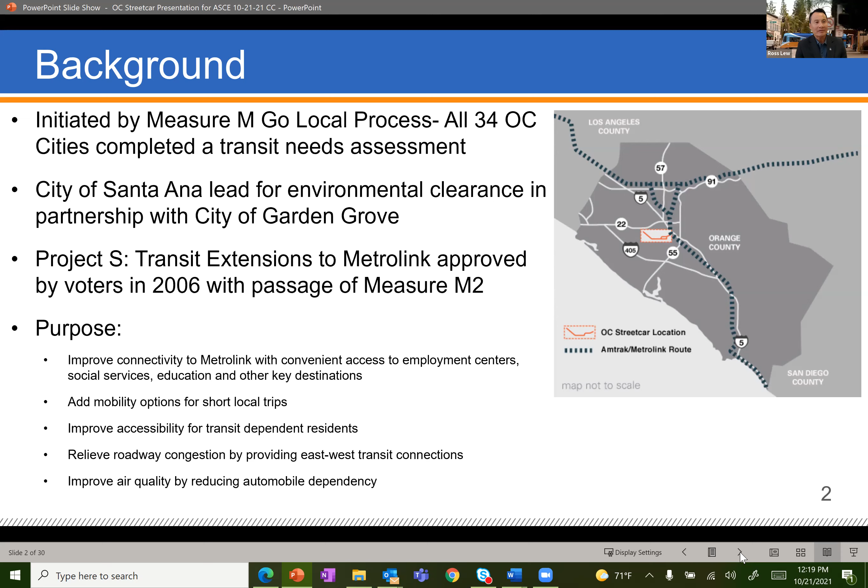As Kelly mentioned, the project is primarily in the city of Santa Ana, which has been very supportive of OCTA and this project. And there's a vast community within Santa Ana, and I'm going to have Teresa share with you the outlay of those communities.

Oh, I see a green block on the screen. I'm not sure where that came from, sorry. No worries, we can somehow turn that off. I'm doing my best. Thanks, Teresa. I'm going to stop sharing and get out. Okay, there we go. Again, I apologize for the technical issue. No worries.

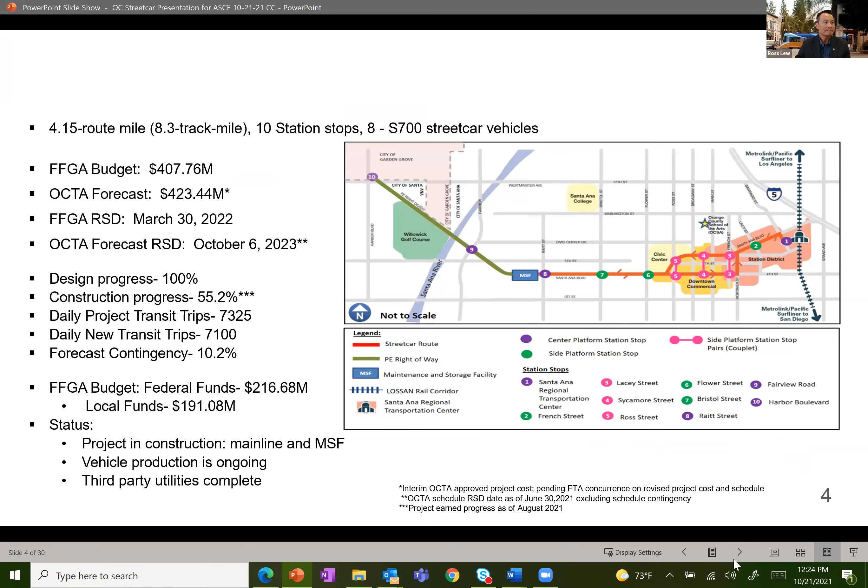And that's why I'm looking so forward to getting back in person, not having to deal with technical difficulties or the mute button. So we can go back to the previous slide, Teresa. Yep, just a second. Sorry, again, not sure. Oh, that's okay. So I think I left off, it's about... oops. Sorry, this is. Okay, how did we somehow get out of order here. Okay, I'm on this, okay, hang on one second.

Okay, thank you. So currently our budget for this project, which includes the design, the planning, environmental, construction, and project management, is $423.44 million. Our current forecast is to have the revenue service date, in which the trains will be running and open to the public, on October 6th of 2023.

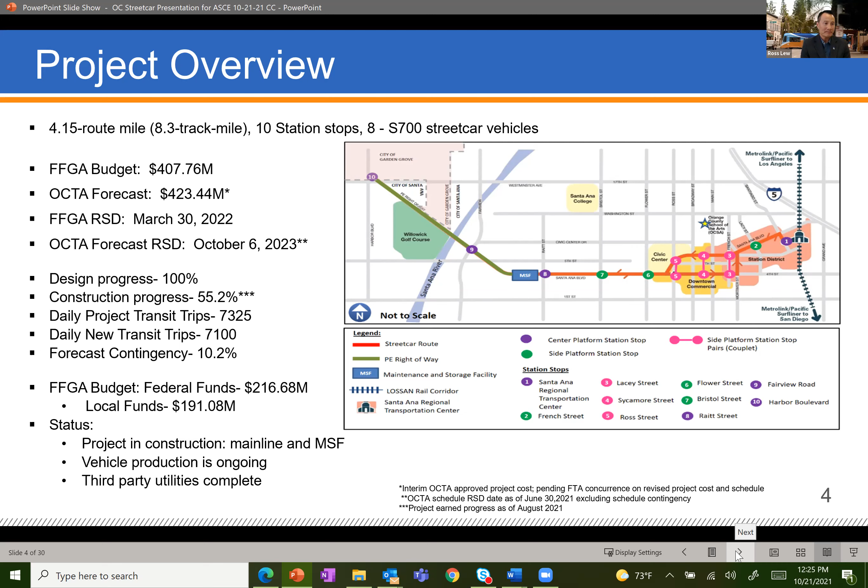Design is done, as you know, it's in construction right now. We're about 55% in terms of construction completion, based on what the contractor has submitted in his pay applications. We'll go into the next slide.

Okay, here's how the project's organized. The image on the left, I'm not going to go into details for every element, but basically just to point out, it is a large team that's needed to manage this project. Some of the key players on this project are highlighted to the right side.

We have HDR as our program manager doing the design and also construction. We have HNTB as the lead designer, along with all the sub-consultants, including DS Yorman, FPL, and others. Walsh is our main contractor; we're a little over 2 years into this construction.

We have PGH Wong as the construction manager, and I want to reiterate HDR, as our program manager, manages the overall construction, coordinating with Walsh and also PGH Wong. An important player on this is Siemens, who is the main vehicle manufacturer, and Cleve will go into a little more detail on that. We also have Herzog, who will be our operation and maintenance contractor once this project is up and running.

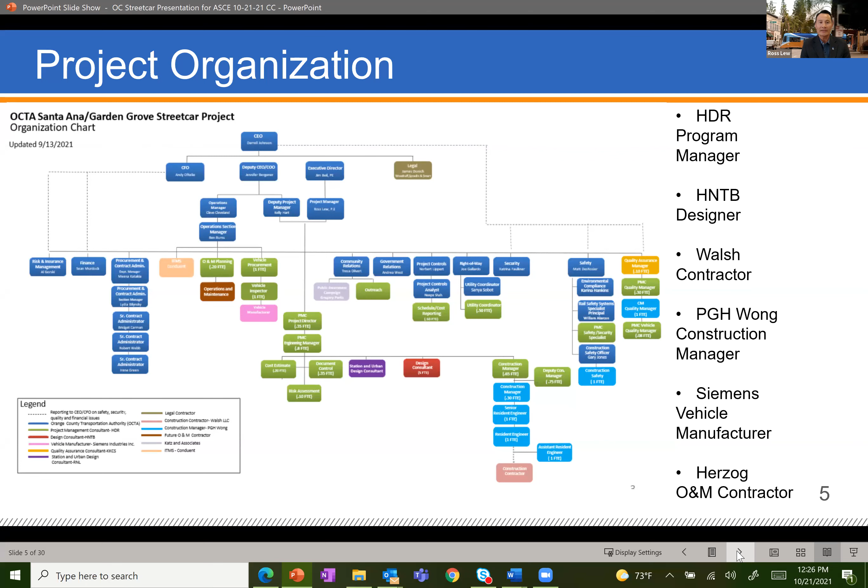As I go into the construction, I want to share the two main features of this project. We'll start with the blue box on the left side, where the alignment goes from Garden Grove at the top left down towards Santa Ana. Within this segment, the streetcar is within the Pacific Electric right-of-way, owned by OCTA. The uniqueness here is that the tracks are on ballast, which is the typical rail track, and when it crosses onto bridges, it's a direct fixation track. There are a couple of key elements associated with that segment, including bridges and at-grade crossings.

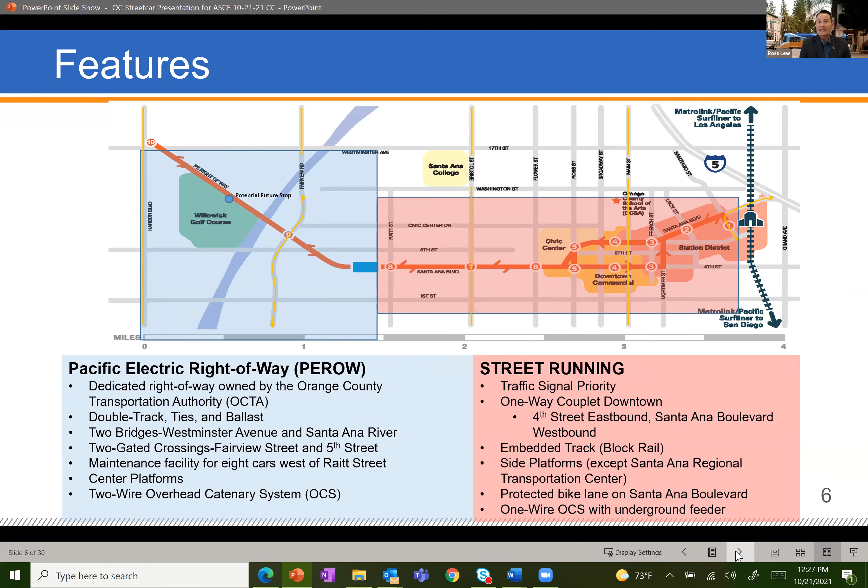On the right side, shown in a salmon color, is where the streetcar transitions from the ballast track onto street running. In other words, the track is embedded within the street and flush, so running alongside the streetcar is a lane that vehicles can also use. Okay, let's go on to the next slide.

We'll start with segment one, which is in the PE right-of-way on the west end. As noted, there are several bridges associated with this segment: the Westminster Bridge that crosses over Westminster, and the Santa Ana River Bridge. We also have the large maintenance and storage facility, two at-grade crossings at Fairview and 5th Street, and several stations along the way. Next slide.

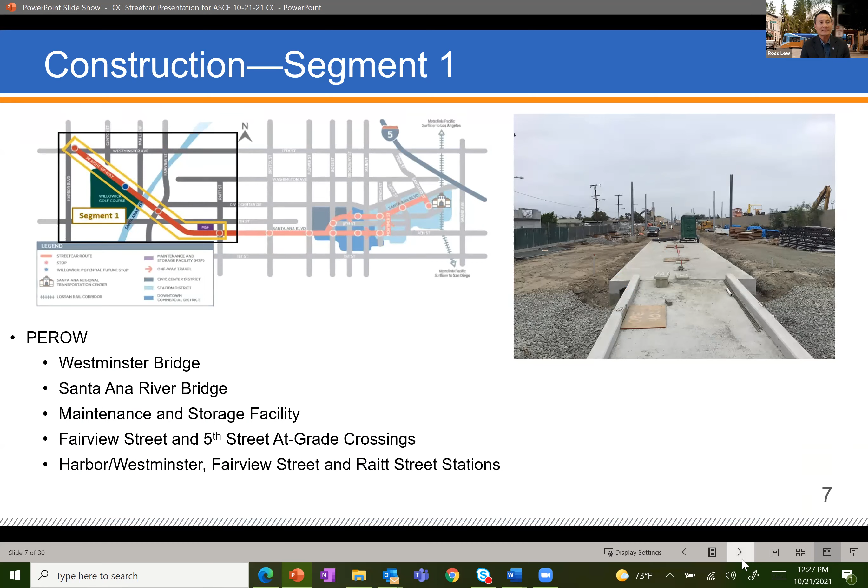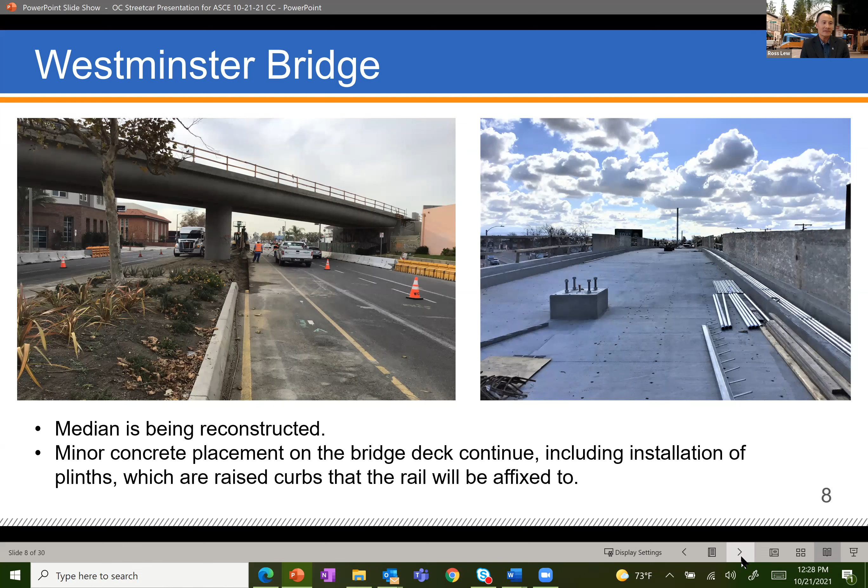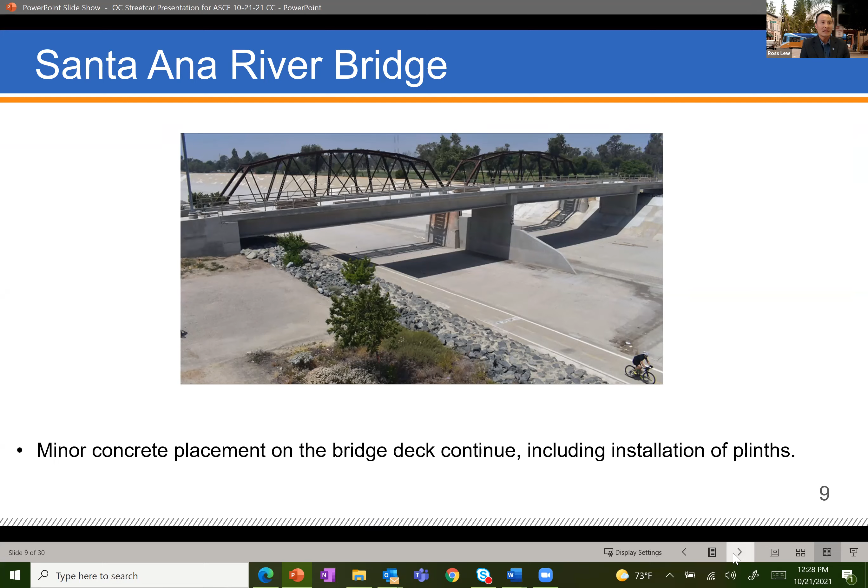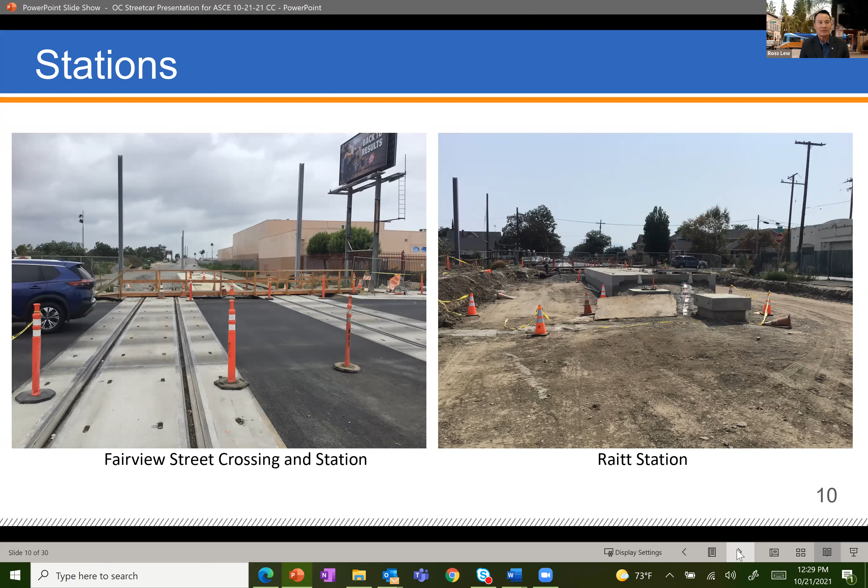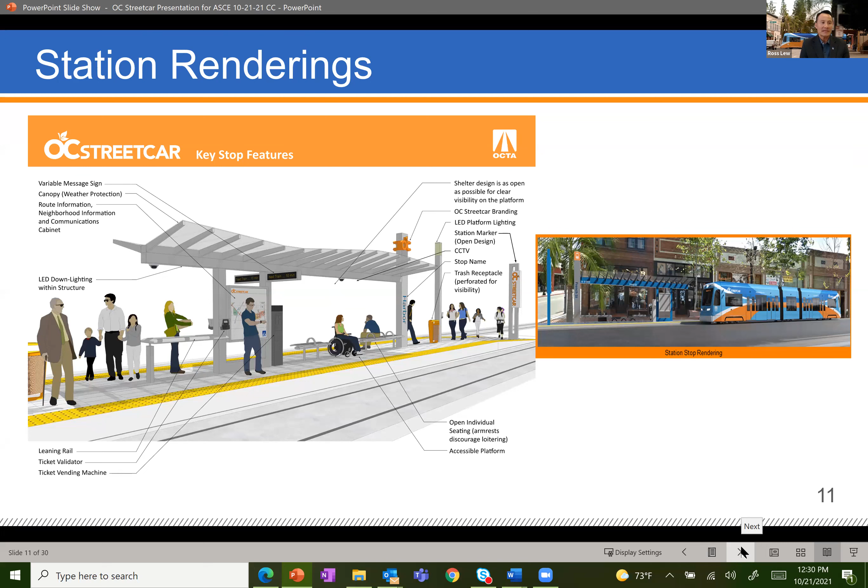Next slide. So here, I'm going to hand off to Cleve to share with you the large maintenance and storage facility that we have.

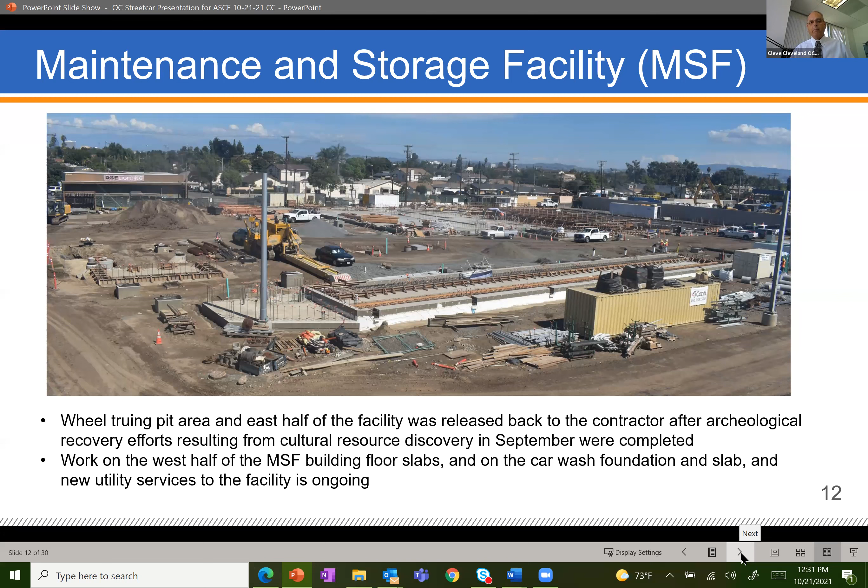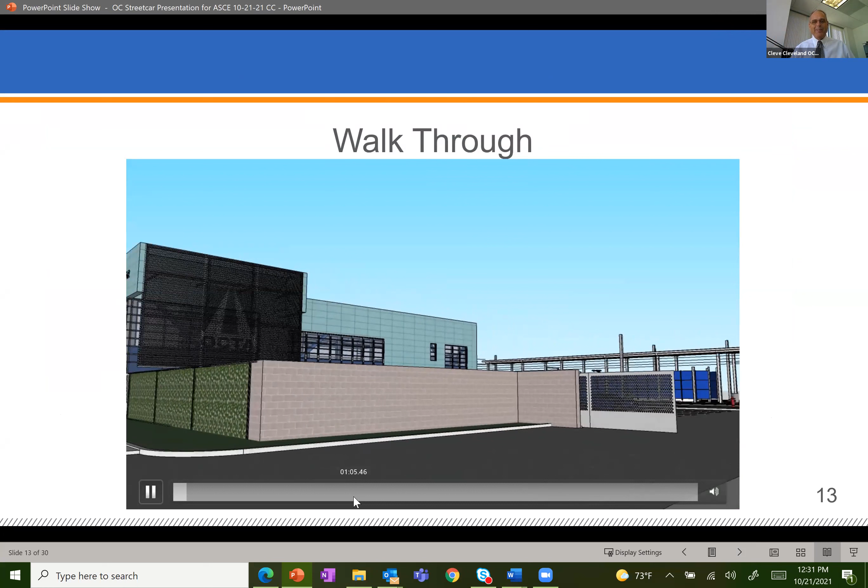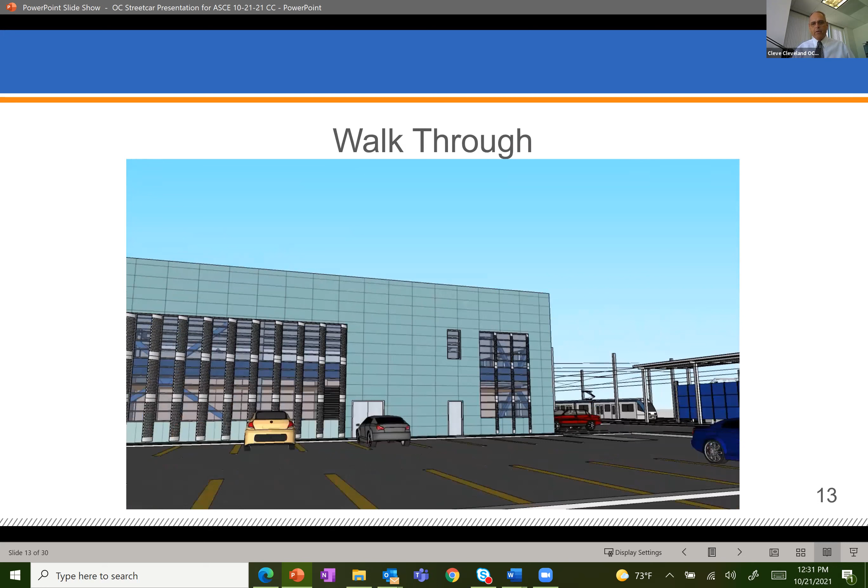So this is a walkthrough of the MSF. Our entrance to the MSF is off 5th Street, West 5th Street, so you'll come in through these gates. If you're driving, there'll be a man gate to the left as we come through. This is the parking area for employees and for deliveries. To the left here will be the main doors to enter the building, and inside that will be our reception area.

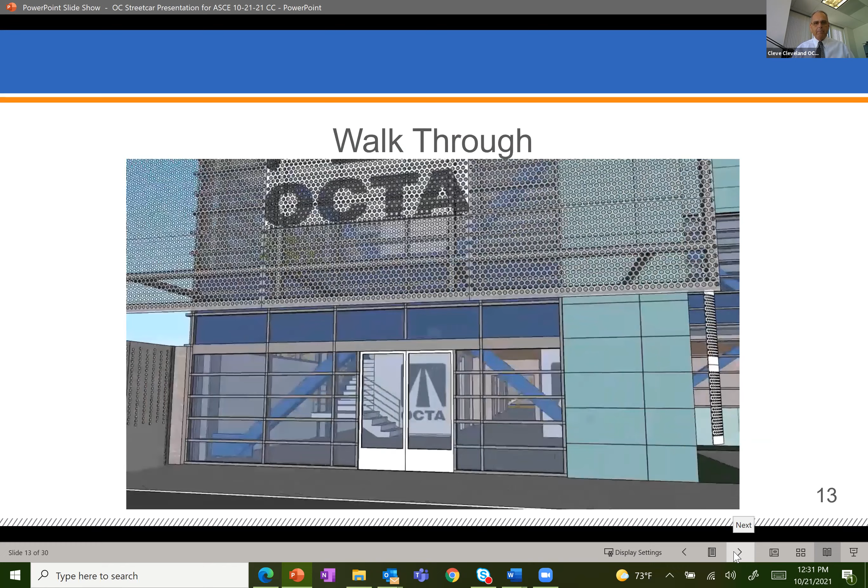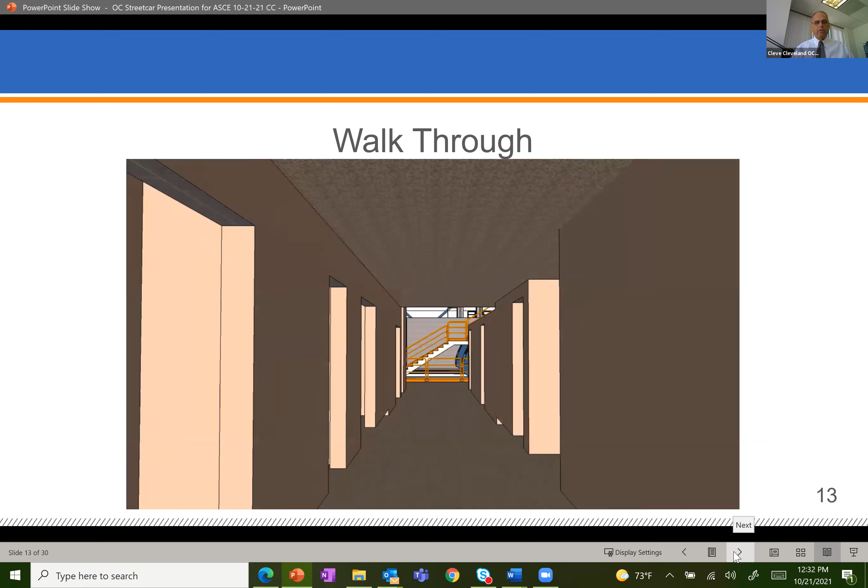There are several offices located on the 1st and 2nd floor, most of them on the 2nd floor. As you come through the entrance, you'll go directly into the maintenance area, which has the 4 bays I mentioned. The first 2 bays you're looking at right now are pit areas, so we'll be able to work underneath the vehicle and do everything we need to do. And then we have a mezzanine area.

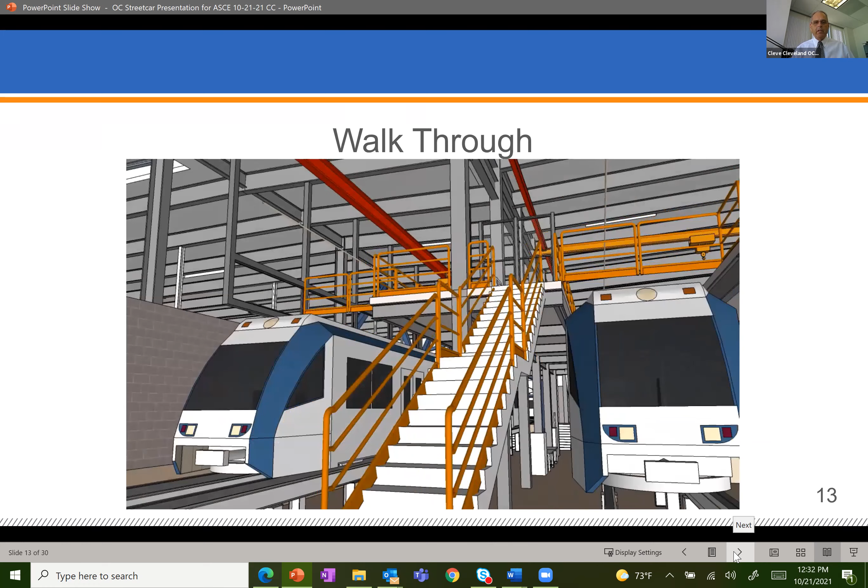These stairs to the right will take you upstairs to the mezzanine area. We have 2 bridge cranes that you'll see when we get up to the top, so we can lift everything off of the platforms upstairs here.

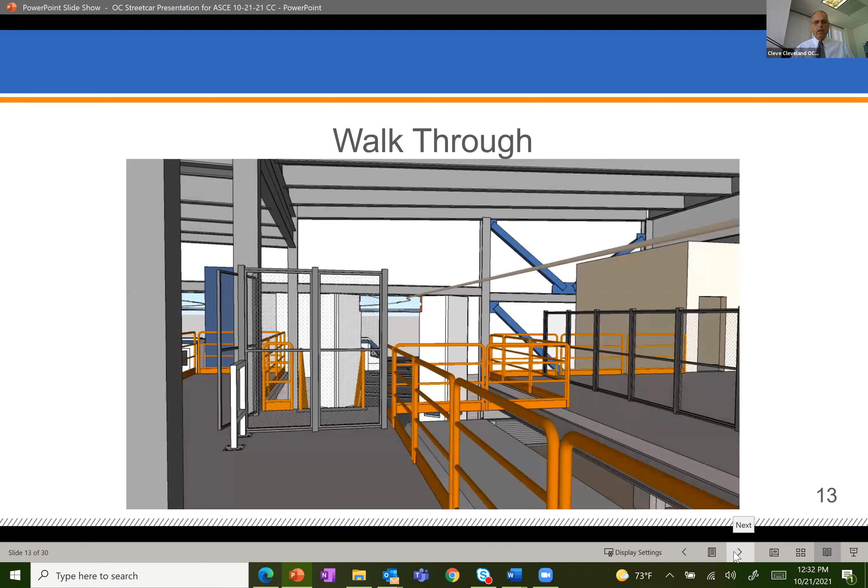As we come back down the stairs, you'll see we have bifold doors throughout the building, which is really nice. They beat the roll-up doors by a considerable amount.

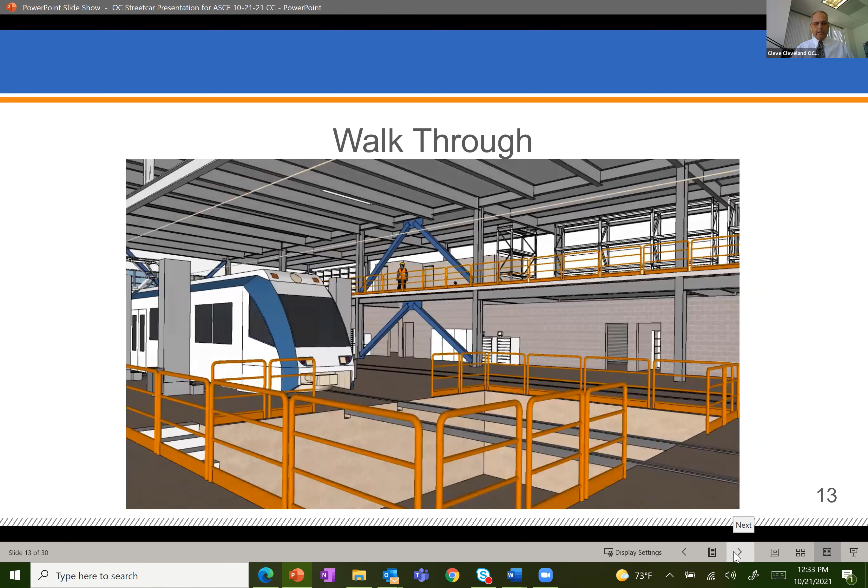This is the wheel truing pit. We talked a little bit about this. This is actually going to be a mill, and it has a short pit here with 2 turntables.

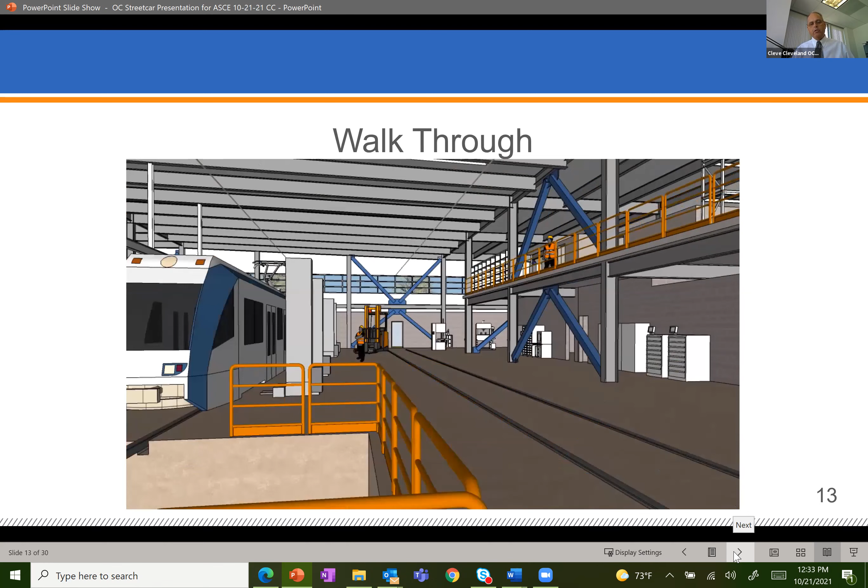To the left, you see another set of tracks, that's for our truck rebuild area. And then to the right is the 4th bay, and we can put maintenance-of-way vehicles in this area. We can put a train in this if we want to.

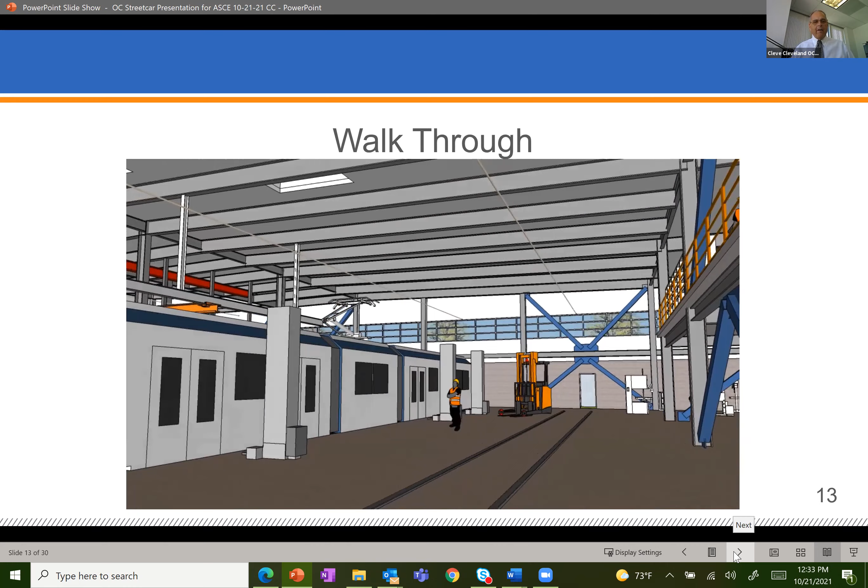To the left are the portable lifts. We'll actually lift the train up to change the trucks out on the vehicle, and we use portable lifts so we can position the train wherever we want it.

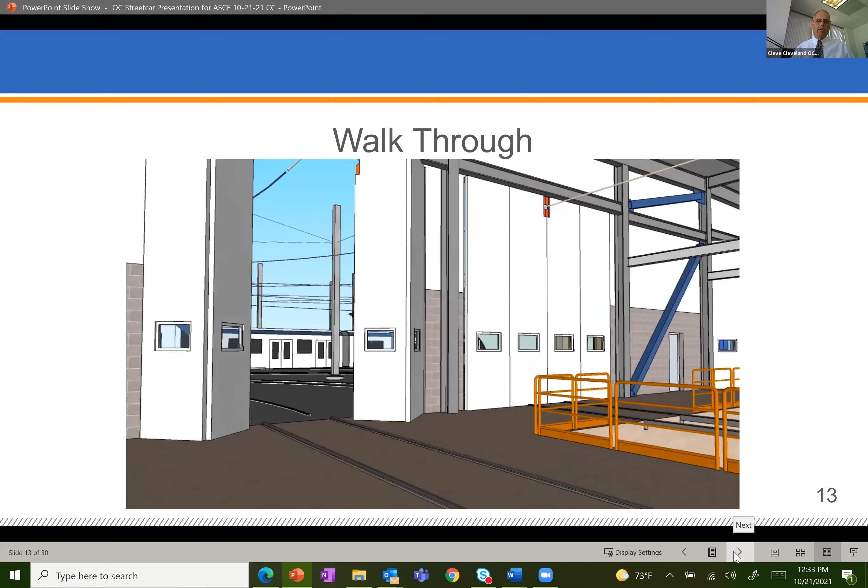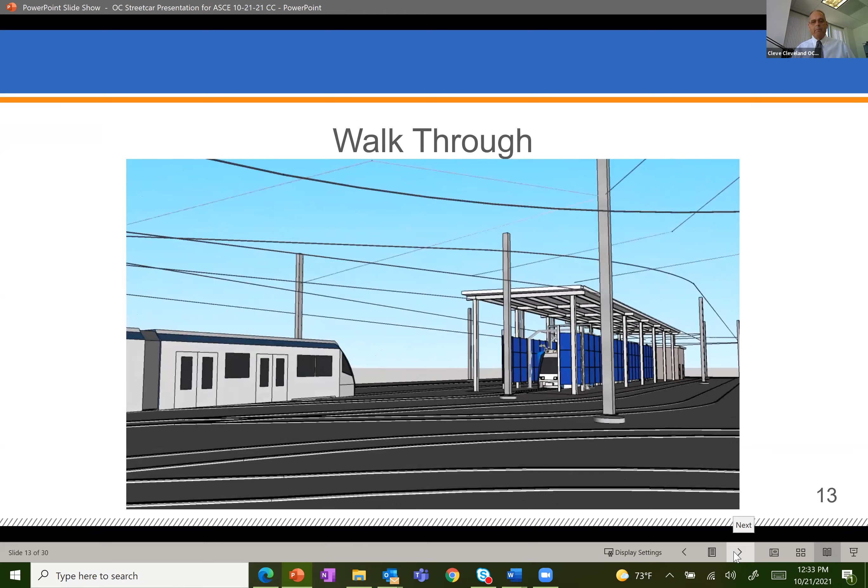As we turn back and start heading west again, we're going out to the parking area. We also have storage out here for additional trains. We have 8 to start, and we can bring in 7 more trains in addition to this for future building.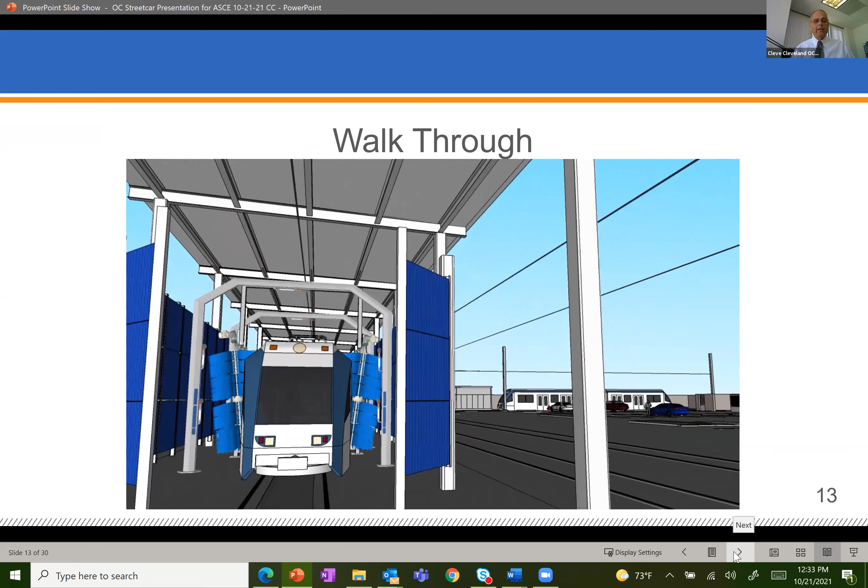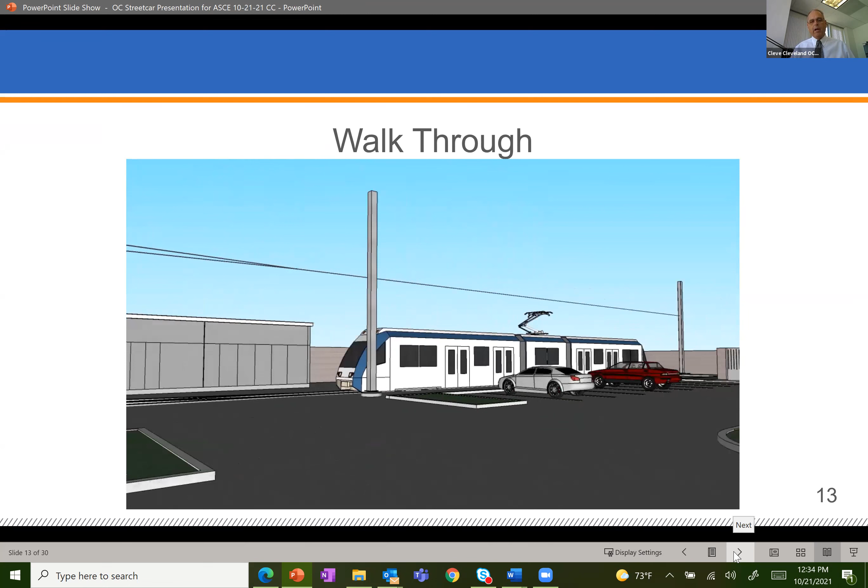Directly back here, we're looking at a traction power substation, this is traction power substation number 2, a 1 megawatt station. We also have a wye track so we can turn the vehicles around, so we can really get some constant wheel wear on this. We don't like just running them in one direction all the time.

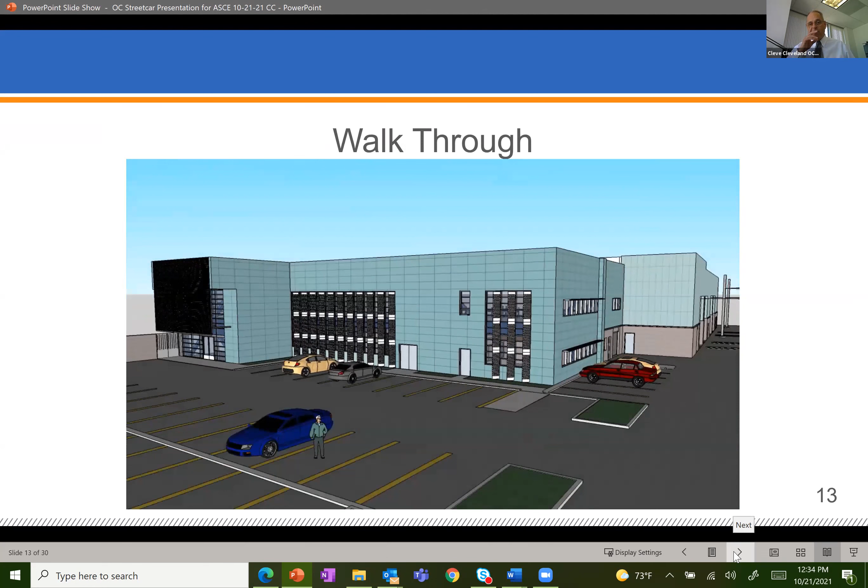So this is kind of a quick look around what this facility is going to look like. It's going to be a little better than 50,000 square feet when we get done with this, and we're really excited about the expansion potential for this building.

Thanks, Cleve. So the previous photo of the MSF, you'll see for the most part the foundation was already put in. We're pretty excited for the upcoming months when we're going to start doing steel girder erection, so we're going to start seeing the facility itself start rising out of the ground. We're really excited for that.

Moving on to construction within segments 2 through 5. This is where we transition from the ballast tracks onto the street running track, which is embedded within the pavement itself. As you can see, it's flush within the pavement. There's also a lane that vehicles can use when the streetcar is not occupying that track. On the image on the left, I want to orient everyone regarding how the segments are noted. Segment 2 is between Raitt and Bristol, for those familiar with the Santa Ana area.

Segment 3 is where we have the tracks running westbound at the top half there. Segment 4, which aligns with 4th Street, is where the tracks are running eastbound. And then when the track comes together into segment 5, that leads you to the SARTIC.

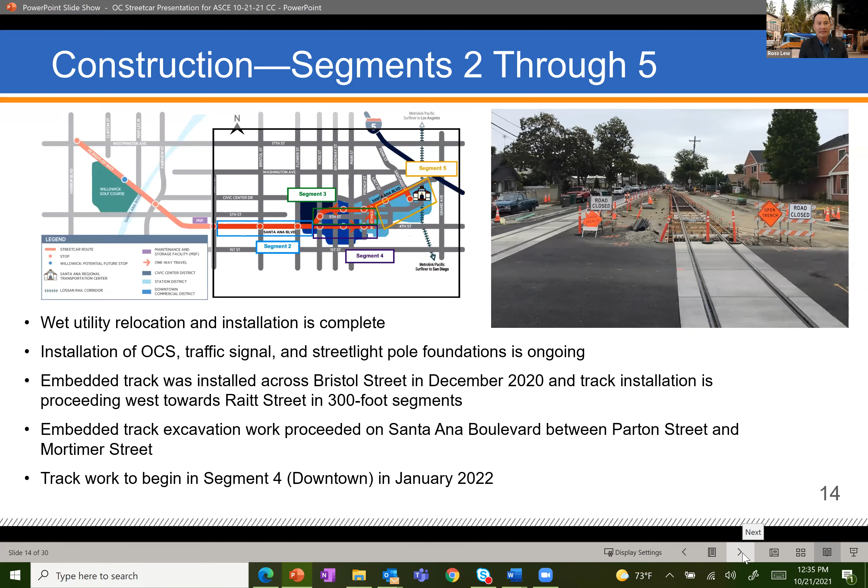So I just want to share with you some of the track installation that occurred over this past summer. Due to the extreme change in temperature, with cool nights and really hot days, what we had to do was start the track pour very early in the night. We usually start work around 2 a.m., as shown on the left photo there.

It's pitch dark and we have the lights. That's where the team, Walsh's team, would set up the track, make sure it's positioned, survey, and everything's on precise alignment for the upcoming pour, which generally occurs around 6 o'clock. So it's a long lead time just to set up the tracks before the pour.

The image on the right there shows the pour occurring, and the image on the left shows the trimming off of the surface.

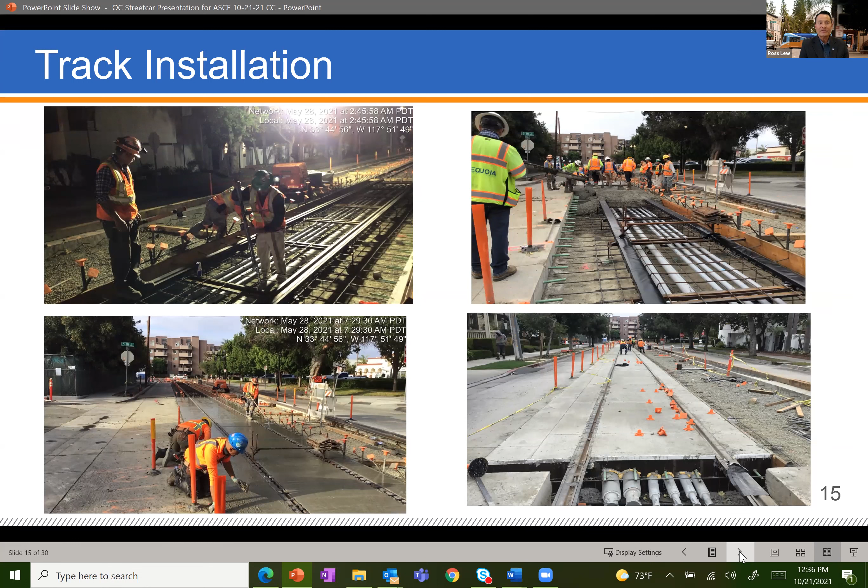The image on the lower right shows pretty much the finished product. As you can see, there are numerous conduits in our track bed for communication, electrical, and signalization. It's basically a very condensed skeleton that comprises the track bed.

In addition to the track bed, we also have a system installation. The image on the right shows all the conduits as they come out of the streetcar tracks into manholes for maintenance and operational purposes.

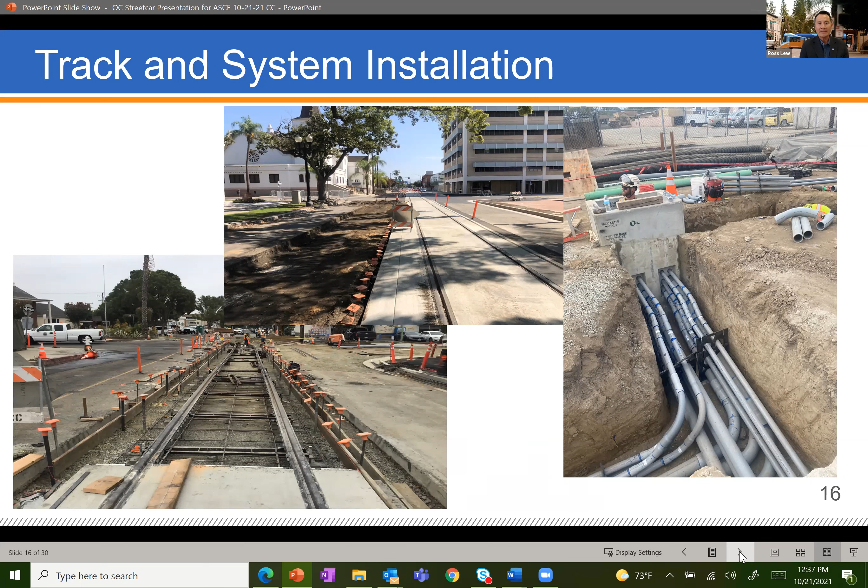Just to give you some images of what's going on, the track for the most part is already completed. These images are several months old, but I want to show you generally how it looks. The image on the left is a view facing east from Raitt Street to Bristol. The track on the left is the westbound track, which we completed in spring of this year. We started work on the eastbound track, on the right side, which was partially poured at that time but has since been completed. This image shows how it looked during the summertime.

Additional images of the work. The Bristol intersection is a major street intersection, so we did a week-long closure to do the work across it. This shows the amount of effort involved, including having the track set, survey, and prep for the pour through the Bristol intersection.

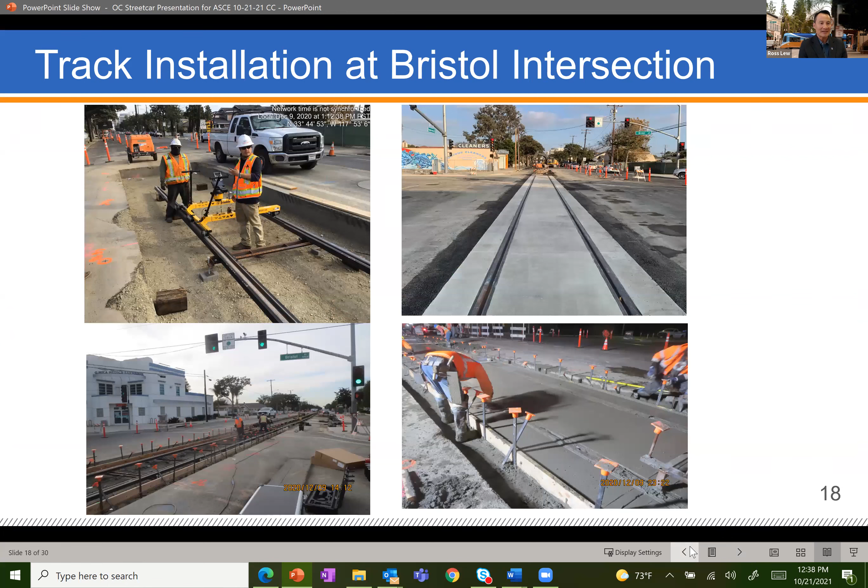As you're proceeding east from Bristol, what we want to highlight here is the amount of coordination associated with this work. In a previous photo from Raitt to Bristol, I forgot to share the amount of coordination that's needed. Let me pause here.

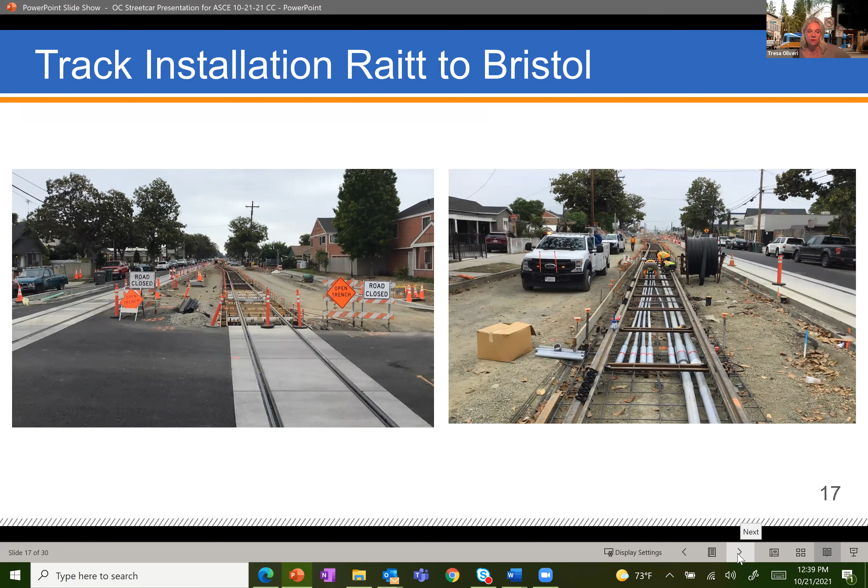I want to give Teresa an opportunity to share the amount of coordination that was needed through this segment, because it's primarily residential. You can see how close we are to people's homes, and for months on end they had to take a ramp down into the area while the track bed was being excavated. We did a lot of knocking on doors and one-on-one conversations, in addition to virtual meetings with the community. The people out there have been great and very patient with us. Thanks, Teresa.

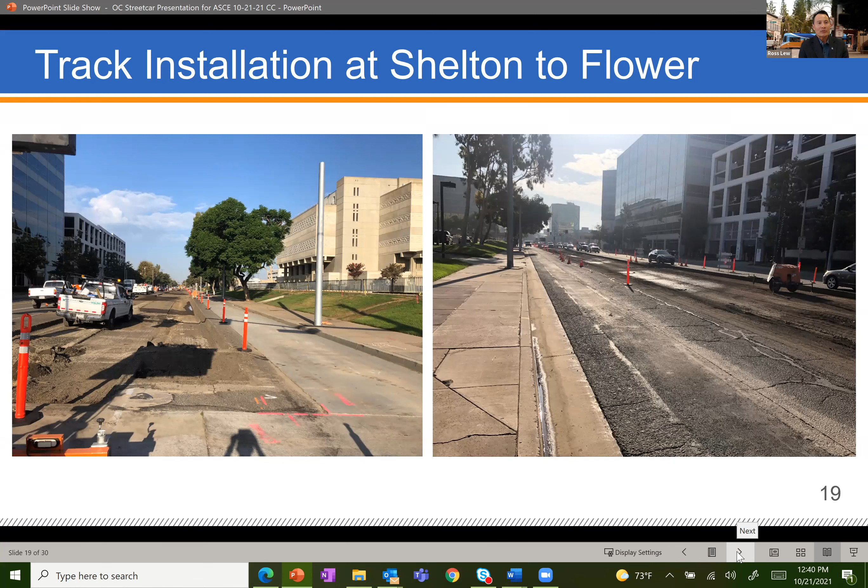The image on the left shows, facing west, the excavation work in the center. To the left, though hard to see, is where we diverted access for public use. The image on the right shows a dedicated access lane only for law enforcement, also visible facing west. There was a lot of coordination needed for this, so I'll have Teresa share some of the things we had to do.

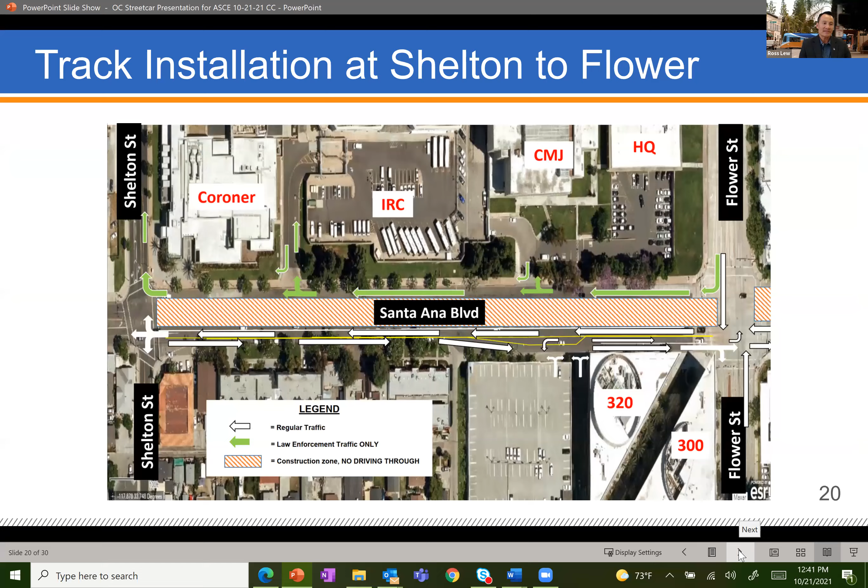Another key facility that we had to closely coordinate is several county buildings over here. We also have the Hall of Administration where the 5 Board of Supervisors have their office, and so maintaining access there is a must for them.

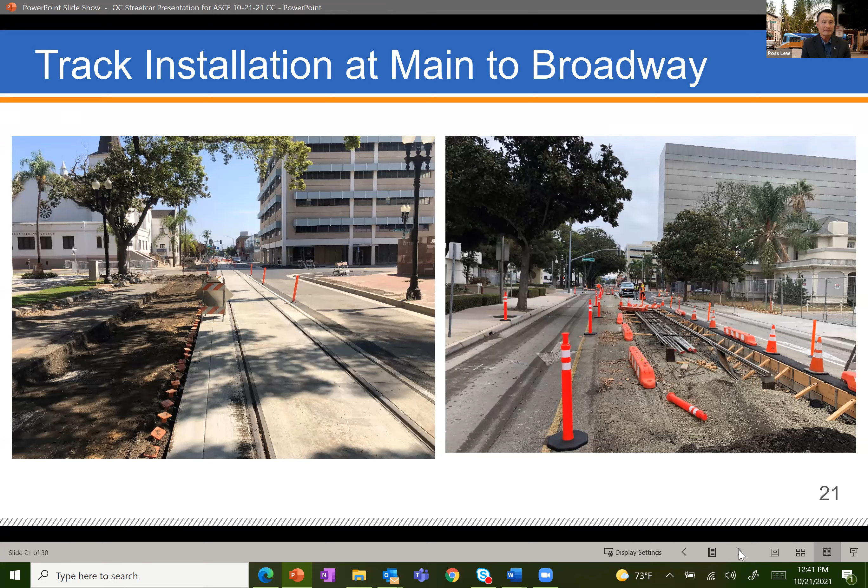This just shows again the Hall of Administration, I call that one of our sensitive receptors, because the 5 Board of Supervisors also sit on our board of directors. So if anything goes wrong here, Daryl gets a call right away. We're doing our best to make sure we keep all of their driveways open, as well as the driveways on the south side of the alignment here, to make sure visitors to their area can get in and out safely.

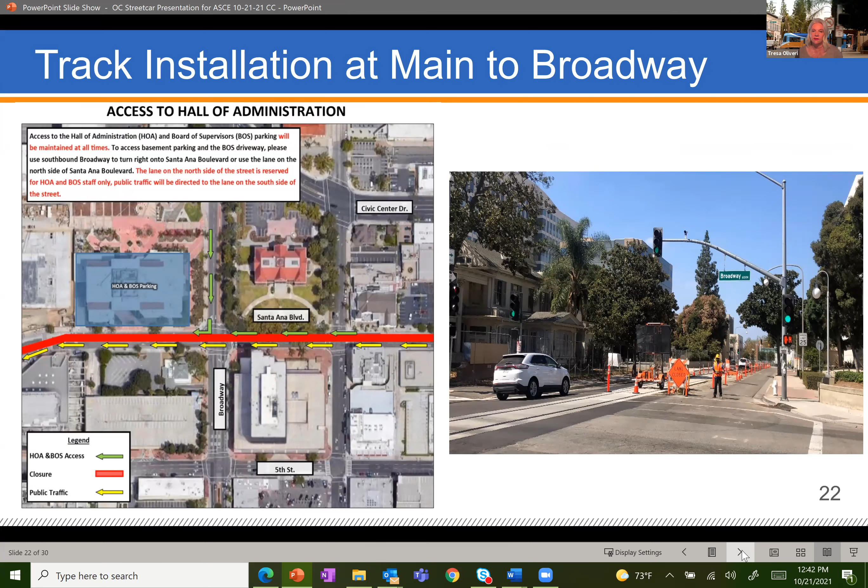The image on the left is just to highlight some of the materials that we have to develop, which is distributed among all the businesses, the agencies, and also the public.

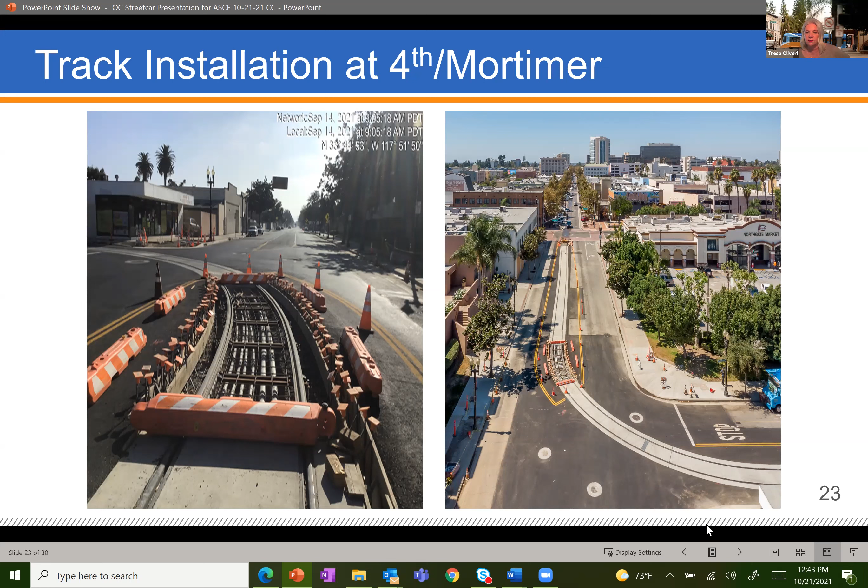I just want to remind everybody of the map we saw before with all the economic development locations. This area over here is the current Northgate Market, and that area is also slated for redevelopment with a tall mixed use building, with commercial on the first floor and residential on the upper floors.

I'll just piggyback on that. I think it's interesting, the curves they were just showing you in that last picture, the 20-meter curves, this is the tightest radius they've ever done for a Siemens S70 or S700 vehicle.

So we're doing a lot of testing with these with Siemens out at the Siemens facility in Sacramento, where we put the vehicle on a turntable and we turn it, we overturn it just by about 2 degrees to make sure it'll fit on our track. There's a lot of modification that actually had to happen to this vehicle in order to make it work for us, but Siemens has been extra diligent to make sure we get a vehicle that will work well on our systems. There's 3 total.

There's 1 out on the embedded track portion in Santa Ana, and then there's 2 in the yard. So we hit these tight radiuses a couple of times.

So let's talk a little bit about the vehicle. It's a Siemens S700 streetcar, produced in Sacramento, California. Not a lot of difference between this and the 70. The biggest is the 70 had forward-facing seats, and inside the S700, the seats in the C car face each other. So there's an A car and a B car, those are the 2 cars on the end, and the middle car is always the C car.

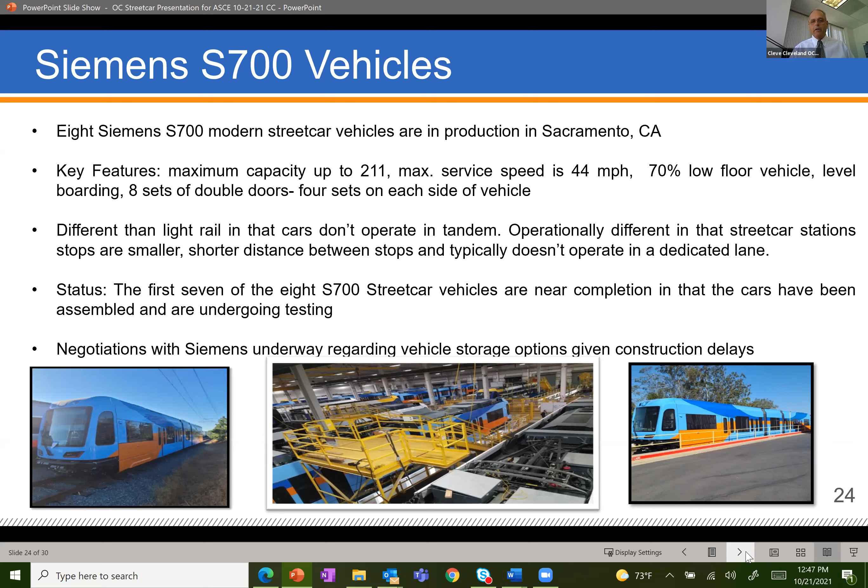We are under negotiations with Siemens regarding the storage of the vehicles, and that's given some of these construction delays. These pictures are kind of nice here, they'll give you an idea of what the vehicles look like out at Siemens during the testing. The center picture is them during production - you can see we kind of own the floor with just our 8 vehicles, so all of them are in there at the same time going to production. The picture on the right is actually one of our streetcars during dynamic testing out on the test track. These are really recent pictures and not a lot of folks have seen these yet.

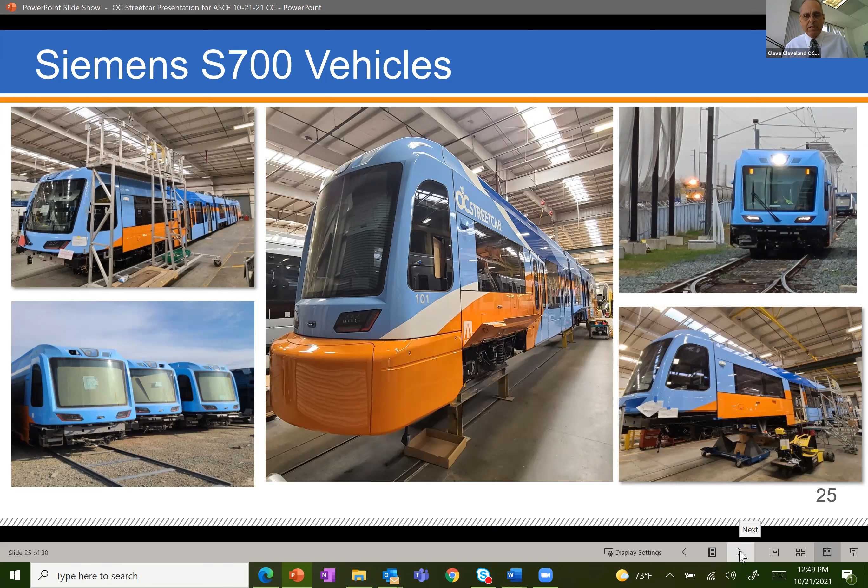We have an emergency battery drive, and for what it's worth, we're the only S700 vehicle that has an emergency battery drive. There is off-wire technology, but that's a whole different use than what we're trying to do, which is to make sure we can take our vehicle out of an intersection should we run into an emergency, such as the power going out or something along those lines. So we have a couple of different ways to get that out. And the bottom right is just one of our vehicles in production before it gets the trucks on it.

This is a little bit about the interior. Sorry, you can't see the floors, but we talked about the C car and the way those seats face each other - this really is what makes it an S700. Other than that, there's not a lot of difference. You can see in the picture on the right some of the double doors standing off into the C car. The really nice thing about this is we've taken a lot of effort to make sure this vehicle is bicycle friendly. We have the only car that Siemens makes with what they call a 4-passenger flip seat, so for extra large mobility devices or for bicycles, you can not only put them on the bicycle racks we have in here, but you can also park them in those areas when they're not occupied by a mobility device or maybe a bicycle.

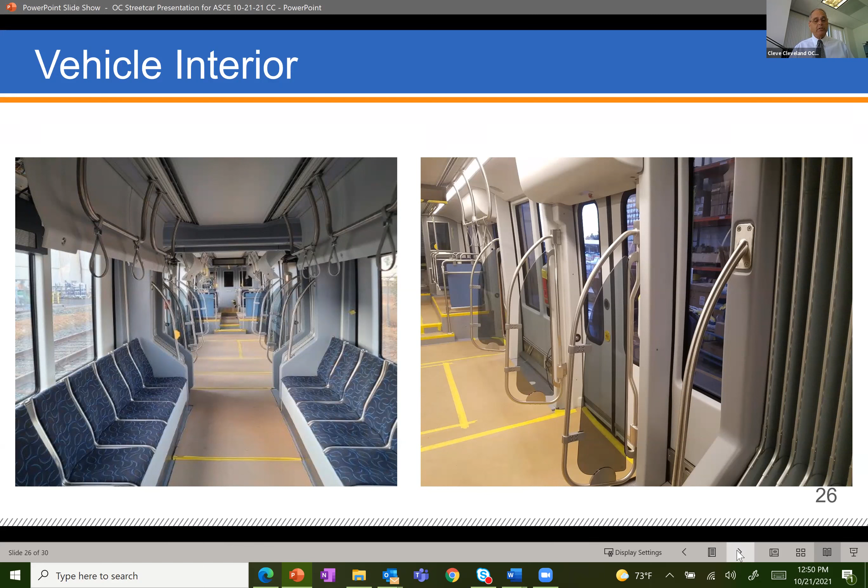So we've really made this commuter friendly, user friendly, not only for passengers, but for the bicycle community at large. I think you saw through the photographs that we go through, we run the gamut of audiences that we need to do outreach for.

All of our forward-facing pieces are bilingual, and we do have some general information pieces that are trilingual, since part of our route goes into Garden Grove, which has a large Vietnamese population.

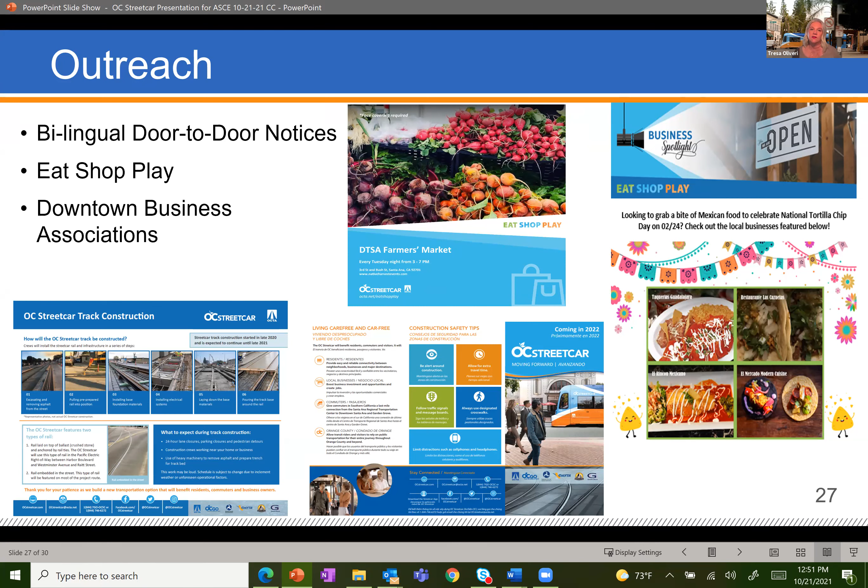In addition to the typical outreach of construction notices, we've also partnered with our downtown business associations. We've provided funding for them to do their own marketing support to help make sure they're bringing people back into the downtown. We also have an Eat Shop Play program, where we provide social media and marketing support to businesses individually. It's a free program that businesses can sign up for through OCTA.

While nowhere near as exciting as some of the pictures that Ross, Tresa, and Cleve shared, we wanted to mention what a critical part the FTA coordination is in delivering this project. As Tresa mentioned, this is a federally funded capital investment grant project. We were successful in 2018 in getting a full funding grant agreement, the first time Orange County had received that type of funding, which was a very exciting milestone.

It's great news for the transit industry in Orange County, but it comes with an extensive amount of oversight from FTA on our project. All of us, regardless of discipline, work a lot to ensure FTA is getting the information they need on a regular basis. We meet with them monthly for 2 hours to go over project status, and we submit a monthly report on the status of the project. Again, very extensive oversight and a lot of effort, but it's exciting and a good use of local dollars that we were able to leverage to get this federal funding. So that's the FTA coordination piece of the project.